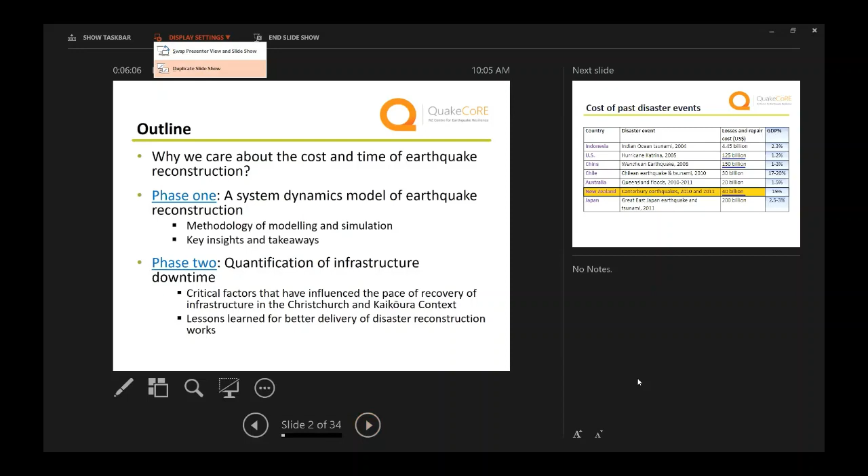Right, so I think this presentation - I've only got 40 minutes. Alice, sorry to interrupt, are you able to set your display settings to duplicate? We see the note screen. Display settings at the top - setting, display settings at the very top. Okay, yep. Duplicate. Can you see only one slide? Very - now good, okay, cool.

So I think I will first talk about why this topic - why we should really care about the cost and time of earthquake reconstruction.

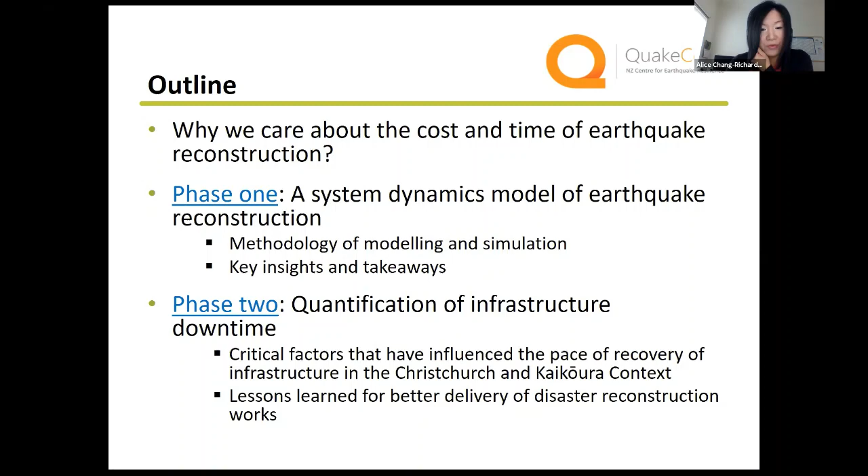I will split this project into 2 sections. One, I'll briefly introduce our system dynamics model, which I've actually presented before to the flagship 5 community, but I possibly want to spend a little bit more time on our phase 2, the quantification part of infrastructure downtime.

So I think first I want to really bring everyone's memories back about the previous disaster events. Those are all the events I've actually been involved with in terms of reconnaissance trips or longitudinal case studies in different countries. So if you look at the losses or the repair cost of all these different events...

What really struck me was really 3 events I actually highlighted, like Hurricane Katrina in the States and also the Wenchuan earthquake. Of course you possibly also saw the Japanese earthquake and tsunami in 2011, which also cost more than $200 billion. But in comparison, in New Zealand the overall estimated cost was still remained at $40 billion.

I think if we only look at the general losses and estimated cost to repair all the damaged assets and infrastructure, it didn't actually give us much information.

But if we look at the ratio of this loss in comparison with the national GDP at the time, I think it would give us another insight. The $40 billion losses in New Zealand was actually very significant to the country, as it accounts for nearly 20% of the national GDP, whereas in the US, China, or even Japan, the amount of damage accounted for only between 1% to 3% of national GDP.

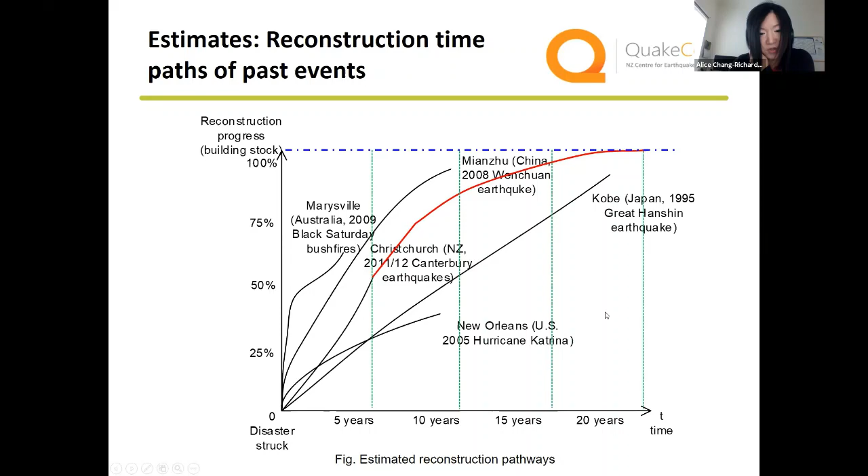So the question is, what actually makes a difference in terms of reconstruction time?

For instance, if you go to any community affected by a disaster event, including Christchurch, and ask people when they want their house to be built or repaired, the immediate response for most people is tomorrow. They want everything repaired and rebuilt as soon as possible so they can get back to their so-called normal life.

So the question is how we can improve our understanding of what's actually driving the reconstruction time frame, and what really makes a fundamental difference in the time path of different events. This is what motivated us to gain this understanding.

For this research project, there are 2 phases. We were successfully funded by QuakeCoRE in phase 1 from 2017. Over nearly 2 years, we tried to understand what fundamentally differentiates the earthquake rebuilding time path in Christchurch, looking at 3 sectors: infrastructure, residential housing, and commercial.

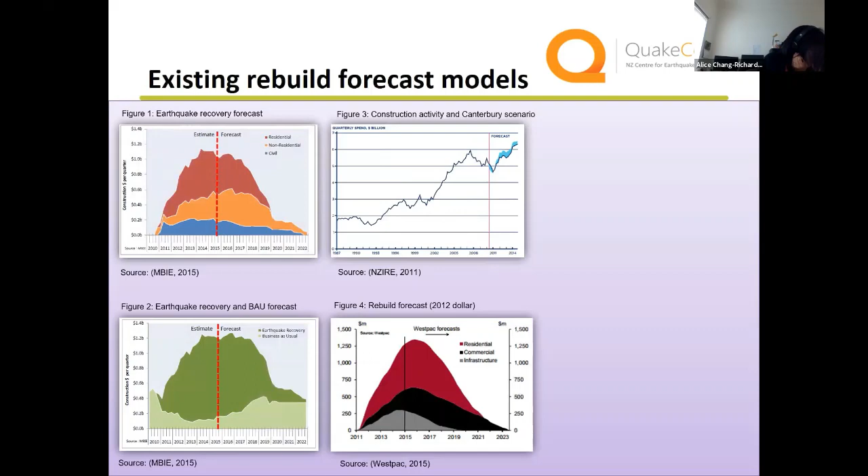So I'll briefly explain what we did in phase one. In New Zealand, following the Canterbury earthquakes, we actually have some existing rebuild forecast models, done by different organizations like SCIRT and MBIE, who had earthquake recovery forecast models.

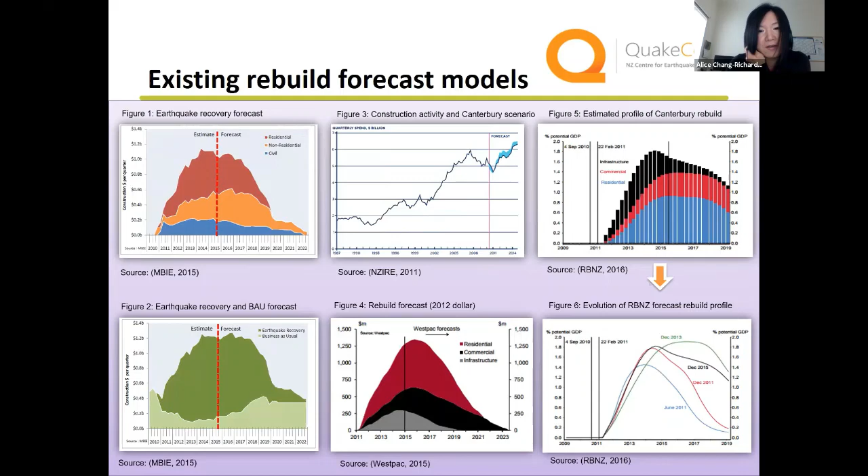Those models were shared across different recovery agencies and organizations. We also have the New Zealand Institute of Economic Research with their own forecast, as well as the Reserve Bank and Westpac. At different stages, they all tried to forecast what the profile of reconstruction would look like.

But the challenge we found is that, even with very good construction forecast models, the construction sector still finds it difficult to forward plan resources and associated rebuild activities. The reason is that relying solely on the intentions of spending to predict reconstruction time path is not really sufficient.

What we really need to understand is more about what is actually happening during the reconstruction process, and then how we can make sure that once we've identified those critical factors, we can manipulate them to achieve a more speedy recovery. So we used a different approach: a system dynamics model. This model considers the damaged building stock as a system, and as the model changes over the entire reconstruction time, we try to understand the dynamics underlying why certain things happen.

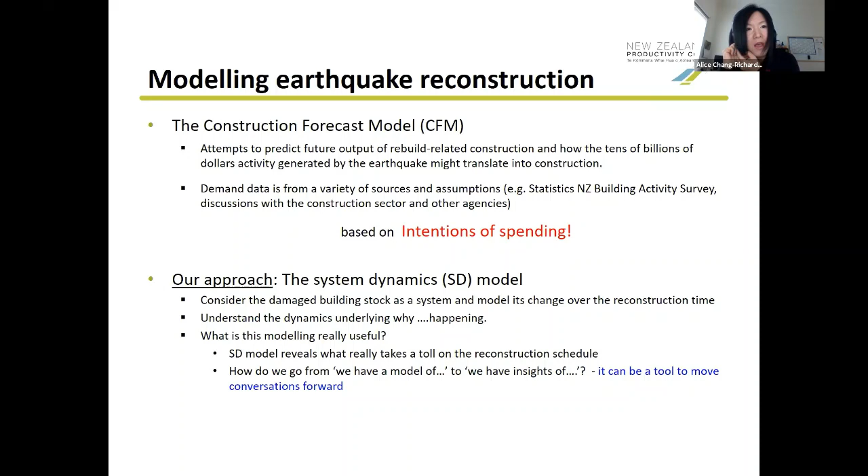One thing I want to highlight about our approach: it's intended to reveal insights about what really takes a toll on the reconstruction schedule, and also to explain, from the model, what kind of insights we can offer to the industry and government agencies. We found that the system dynamics model can be a very good tool to move these conversations forward.

Also, quickly explaining our methodology: we divided the entire reconstruction process of the built environment into 4 stages, starting from inspection, like damage assessment, and then moving to decision making. Decision making here involves land zoning, planning, and setting up governance institution arrangements like SCIRT for recovery, so all the critical decisions involved for overall recovery.

After all the decisions are made, it comes to the financing and planning stage for the damaged assets. For instance, for the residential sector, this involves the insurance payout process, and also what kind of design and foundations should be put in place for a particular house. There's a lot of planning involved in this stage. Once everything is in place, it can move to the repairing and rebuilding stage.

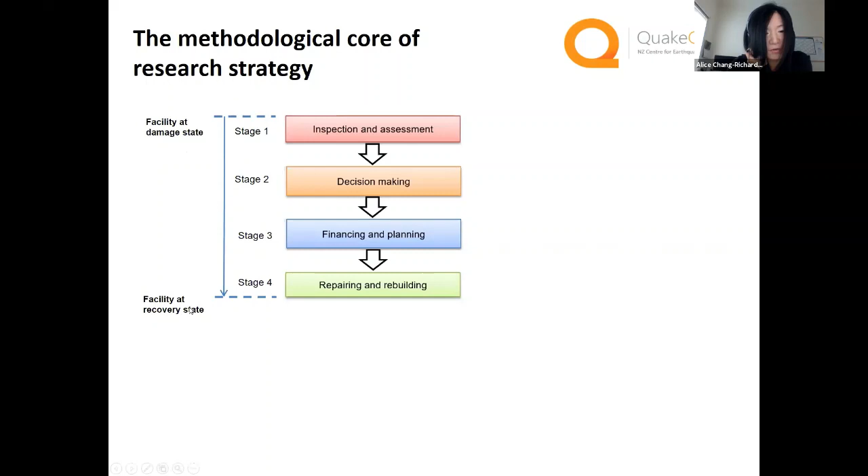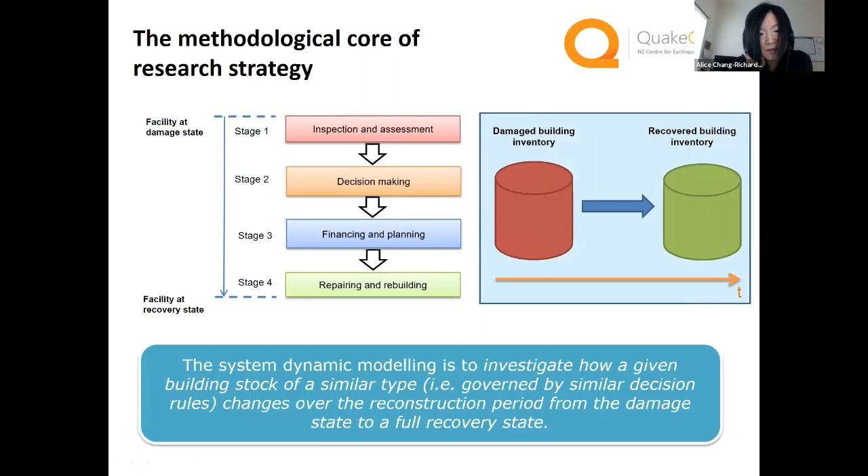What we try to do is, for one damaged facility, whether it's a residential house, a piece of infrastructure, or a commercial building, we model how this facility changes from the damaged state over time to its full recovery state. I'll use this diagram to show what we're doing: using system dynamics modeling to investigate how a given building stock can change over time from the damaged state to the full recovery state.

I'll quickly brush off these parts because it's pretty much system dynamics modeling terminology and jargon. I'll try to explain it as simply as I can. This is more like a causal diagram to illustrate what we're saying.

For instance, a damaged structure, after inspecting and assessing, goes through the decision-making process. Then this is another stock, we can name it structures under decision rules. After financing and planning, we can call it structures ready for repairs and rebuilds. After a certain time, this stock moves to another state called structures working in progress, or under work. So this part is really the physical construction process.

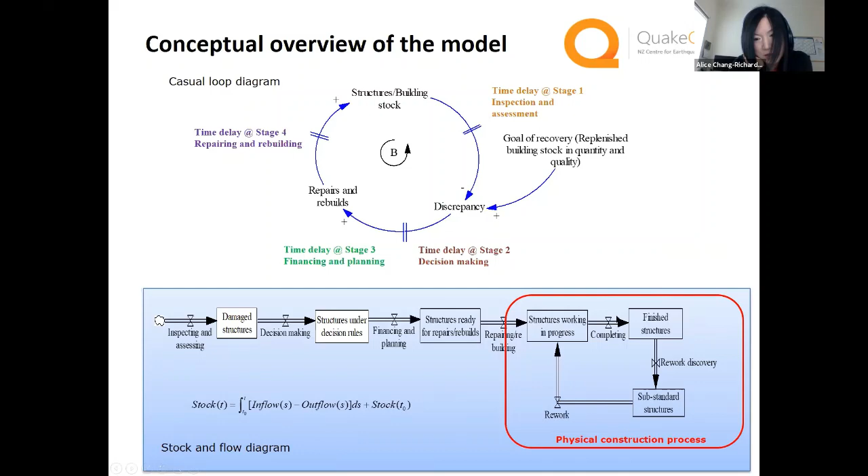But for a damaged building or piece of infrastructure to move into this physical construction process, it has to go through the entire preceding procedures. Here is a more mathematical representation of how one facility can change from the damaged state to, in the end, the full recovery state.

We also did interviews with a large number of stakeholders and construction industry practitioners and government agencies. We have identified conceptually the critical mechanisms affecting rebuild recovery time in general across the three sectors. Those mechanisms fall into four categories.

Of course, planning and regulation play a major role. The second one is not a surprise, it's always resource constraint, the capability of the engineering construction sector. Then there's the financing mechanism, including the insurance settlement process, and also the decision-making time needed and actions of different facility owners, all playing a part in influencing the rebuild time.

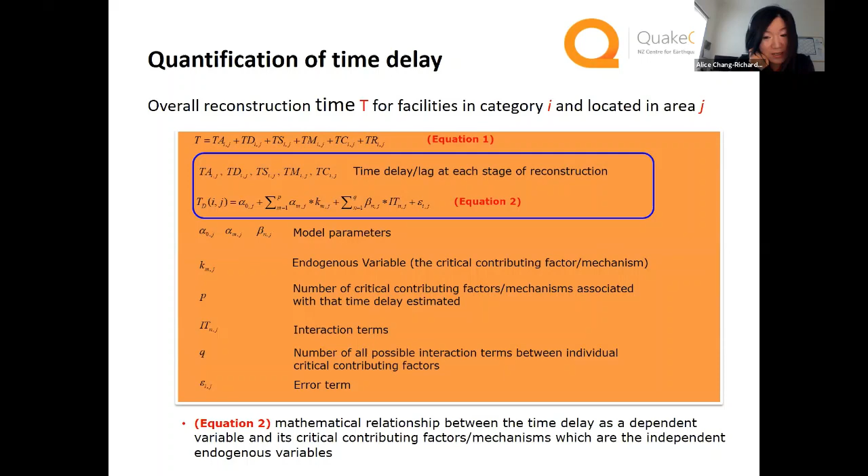So what we try to do is make sure we populate the data we've got into a system dynamics model. Then we use mathematical relationships to represent the different time delays, and how these time delays aggregate together or interdepend on each other to make a big difference in the recovery time in the end.

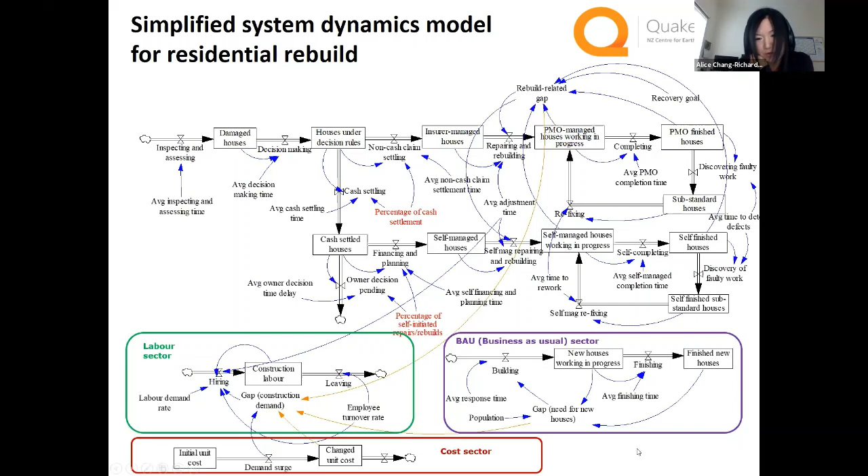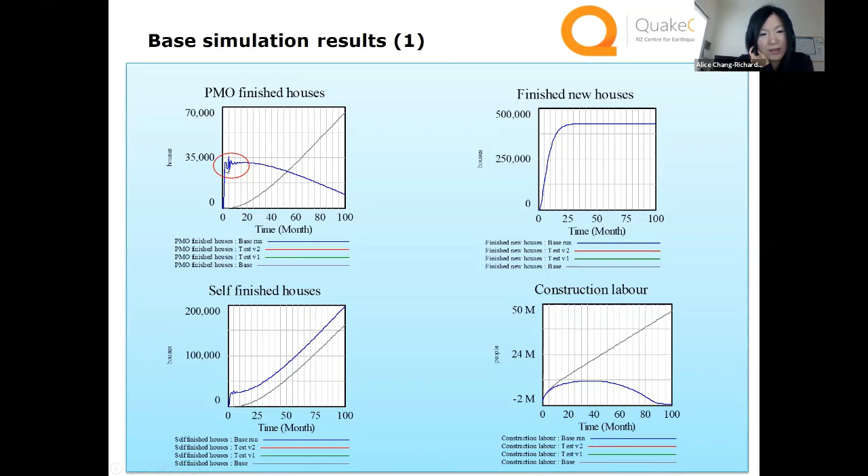So what we did was try to play around with the model to see if we change certain ways the construction sector perceives construction demand, whether we can change the model behavior or the results of the system. What we did was change certain links about where the reconstruction is taking place. At the same time, the construction sector can also have clear visibility of business as usual activity, not only in subdivision areas in Christchurch, but also in Auckland, nationwide, and in Wellington, the infrastructure development happening in other major cities in New Zealand.

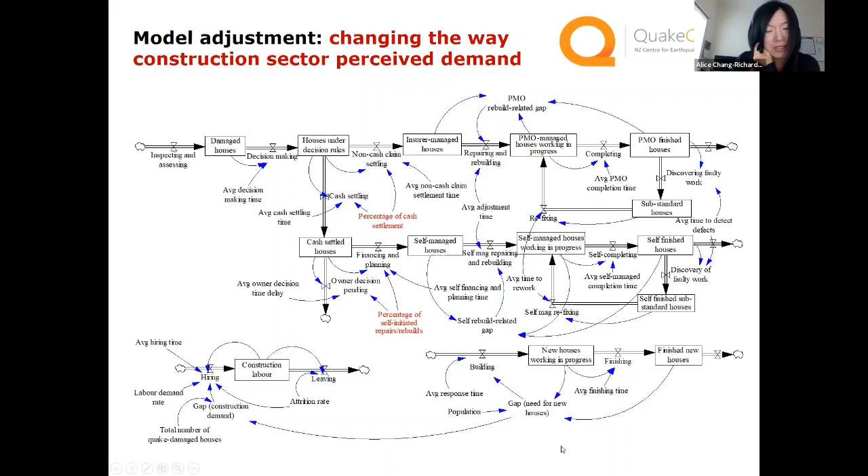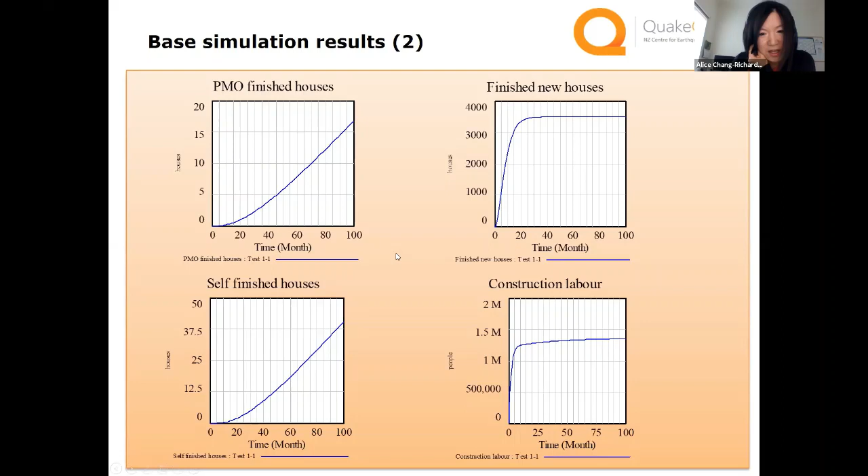At the same time, they have a very good understanding about their capability and resources. So then what would happen? So this is what we've got. We get a nice result, which means there's no oscillation, there's no waste of time, and also no waste of resources.

The first one is we should not overlook the percentage of the total demand, especially from the business as usual sector. Surprisingly, we thought most resources would be drawn to the rebuild sector, but actually what we have found is the value of the business as usual sector also imposed a constraint on how fast we can build in the earthquake reconstruction sector.

And others is pretty much we know very well in terms of how fast the insurance claims can be settled, and the entire sequential requirement, which means the logistics needed to coordinate with the different sectors, having an understanding about the priority of the reconstruction, and then planning for the different services in the horizontal sector to be rebuilt first, followed by the residential sector repairs and rebuilds. So there's planning sequential requirement needed over there.

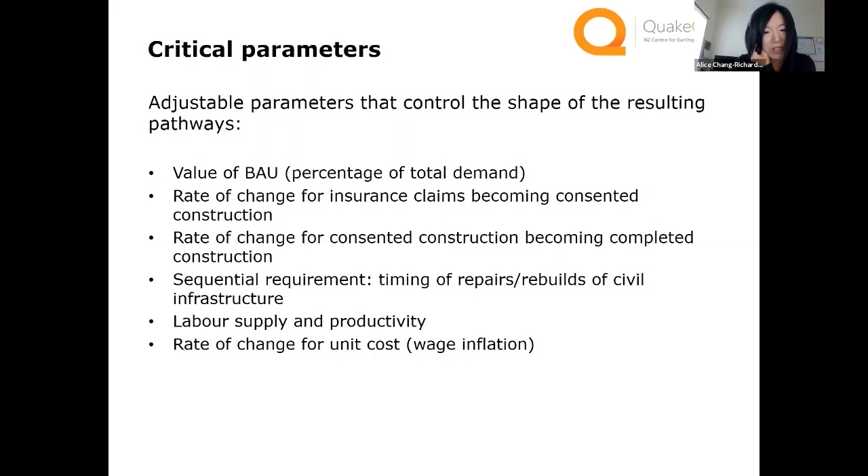And of course, labor supply and productivity, plus the wage inflation. I want to highlight that labor supply is always a problem for the rebuild sectors, not only in New Zealand, but we also have observed in other countries, which always leads to the unpleasant result of wage inflation or cost escalation in the rebuild sector.

Then we try to look at what are the critical links that, if we change certain links, like how the construction sector can perceive the construction demand, the results of the time path can be completely different. So we found regulatory changes are so important because the changed building code and building standard after the quake posed changes to the technical capacity landscape in New Zealand.

Critical links are information links. Things pretty much to do with how the construction sector can really adjust itself in terms of how it can correctly perceive the information, the construction pipeline information from the government, and also the perceived timing.

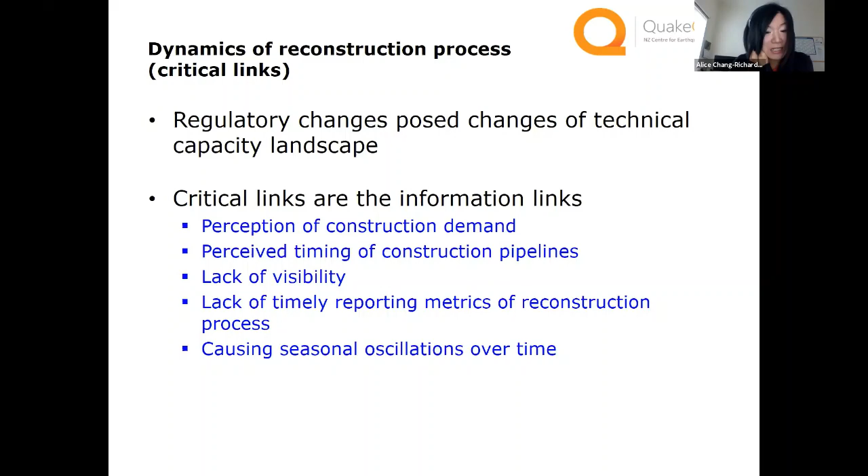In general, there's a sense that there's still a lack of visibility of the reconstruction timelines, which means there's a time lag between the agents reporting the reconstruction pipelines and it becoming real construction, which means the eventuation process always has a delay. And that caused the oscillation over time in the system.

I'll quickly go through this. I think what we have observed from stage 1 is the reconstruction driven by the regulation insurance process. The oscillation type of system behavior shows the unstable response actually from the construction sector. As I said, there's always a delay in the demand landing for reconstruction, which causes incorrect demand perception in the construction sector.

Also, a very important piece of information we want to give to the construction sector, which has been involved in reconstruction and plays a major role in earthquake reconstruction, is that we need a better information reporting system, which means we don't use lagging metrics. That can really help the entire reconstruction process and help speed up any recovery process.

So we have recently published a nice, neat piece of article in the BRANZ Build magazine. If you're interested, feel free to go have a read.

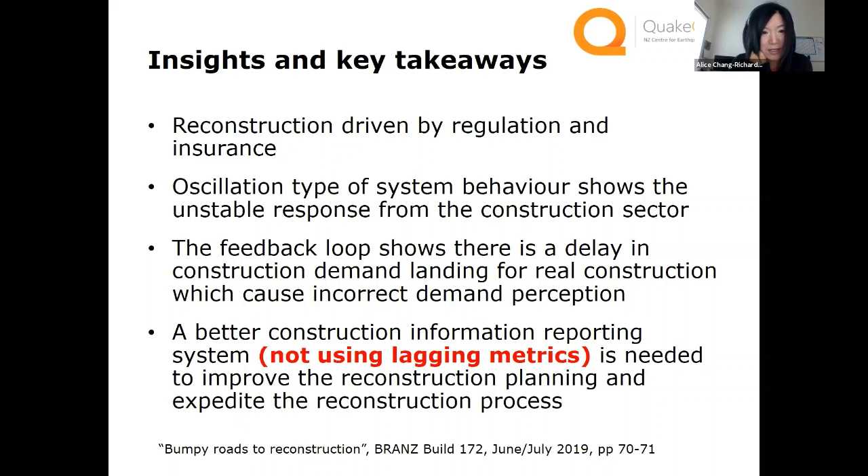So now it takes us to phase 2. Phase 2 is more about, now we pretty much understand how the system, a building stock, can change from the damaged state to the recovery state, and what are the underlying mechanisms at play. But we want to also understand, does that also apply to the infrastructure sector? And to what extent each critical factor can play a role in influencing the infrastructure recovery time.

So we have undertaken quite extensive field trips to both Christchurch and Kaikōura, not only to understand those critical factors and what that means for the infrastructure sector, but also to understand the different involvement of various groups and what they perceive about their involvement. So I took my lovely master's students and E4 students to Christchurch and Kaikōura. We stayed there for nearly a month.

So we did very extensive interviews with all the different agencies in both Christchurch and Kaikōura. This gives a general overview about who we have talked to. Really big thanks to SCIRT, Christchurch City Council, Kaikōura District Council, and NCTIR for facilitating us with the data collection.

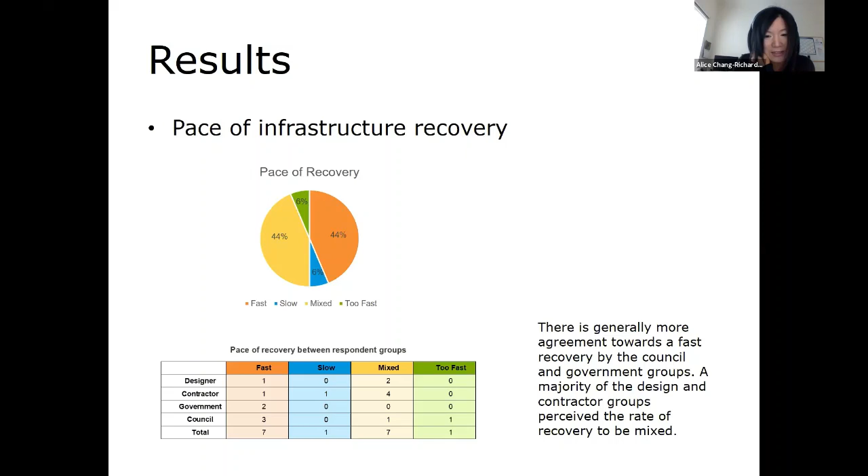We also asked about what challenges were faced in the reconstruction of infrastructure facilities, and divided these challenges into different stages. In the inspection and assessment stage, there was a general sense of lack of information with the council-owned asset management system, largely due to lack of original data about the different utility services underground. So there was a lack of data, and they had to do an extensive amount of work resurveying and gathering the data together and setting up the database.

In the financing stage, they reported, especially for the council, that procurement can be problematic, as they still use a traditional procurement model, so freeing the financing for project allocation can be a little bit challenging.

In the decision-making stage, this is where they highlighted the most challenges, particularly around scope establishment. Especially from the contractors' perspective, they perceived a lack of collaboration between different stakeholders, because they were at the end of the supply chain, the people at the end of the construction process. So they bear a lot of risk if there was a lack of collaboration among stakeholders at the preceding procedures, which shifted a lot of risk to the contractors.

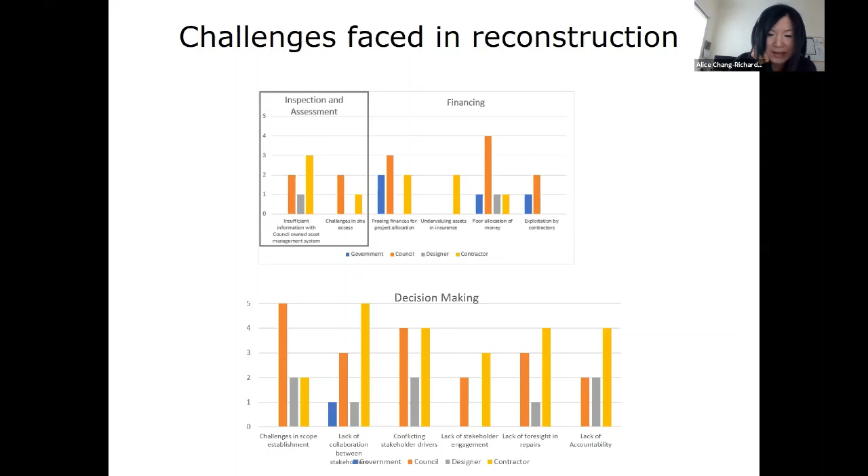There were also reporting results from the contractor's perspective about lack of stakeholder engagement, mostly between contractors and subcontractors. They mentioned the alliance model used for SCIRT and NCTIR was very good at bringing everyone together, but subcontractors felt left behind. They thought if they could also be part of the conversation, as well as the suppliers, because supply chain efficiency can also take a toll on the reconstruction scheduling - suppliers and subcontractors should also be part of the conversation.

When it comes to adjustment, it's more about the planning needed prior to construction. They had very different opinions across the board, so I just want to highlight a few.

The yellow bars show the opinions reported from a contractor's perspective. Since they are the people who will, in the end, do all the physical reconstruction work, they really care if anything happening prior to construction can affect them. So it's not surprising their responses often sound like complaints about the challenges they faced, including a very quick turnover in companies, along with fatigue and burnout.

They also mentioned lack of accommodation in Christchurch, and many other reasons that made it very difficult to maintain staff and keep morale high. Not surprisingly, earthquake fatigue really took a toll on many businesses. A lot of businesses ended up fed up with involvement in the rebuild sector and withdrew, going back to business as usual, because for them the perceived risk was lower.

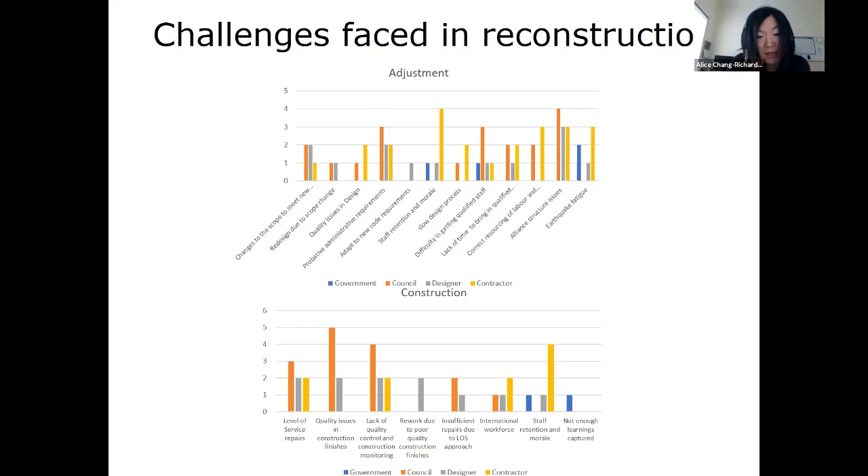The interviews and questionnaire surveys also highlighted the good practice initiatives that actually drove up the speed of recovery. I've listed all these good practice initiatives from top 1 to top 10.

There's a general sense that the exposure to delay has to do with the financing and claim settlement stage, as well as the construction stage. As they proceed through the financing and claims settlement stage and the construction stage, there are more risks and more time delay factors.

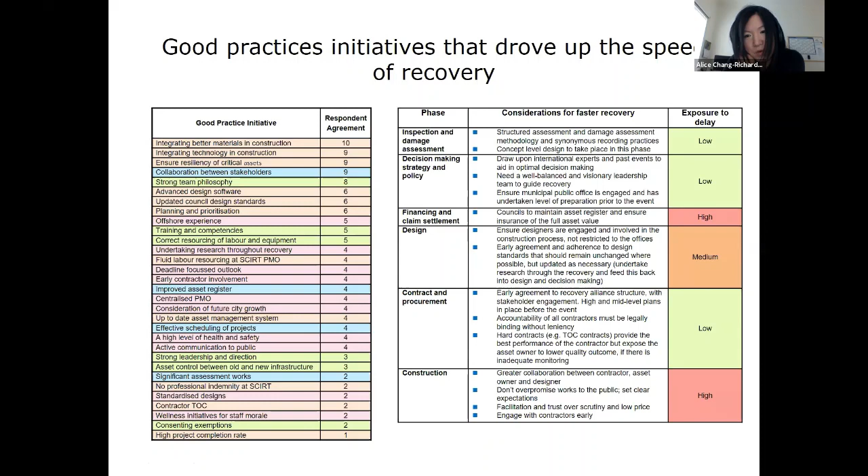We also categorized the learnings from different perspectives: for designers, contractors, government officials, and council staff.

I also won't go too much into the details, but I want to highlight that we ran two focus groups, with both Christchurch City Council and Kaikōura District Council. The common notion from those two focus groups was that, before setting off any reconstruction work, it's critical to understand the different drivers of stakeholders.

It's critical to understand the different drivers of stakeholders and also managing different expectations.

They also mentioned the procurement model, and how going forward for future reconstruction work, the treasury traditional procurement model could be improved, so that it not only has design and build plus all the different stakeholders and clients involved in the alliance team, but it would also be ideal to include the subcontractors and even suppliers in an early contractor involvement kind of regime in the procurement.

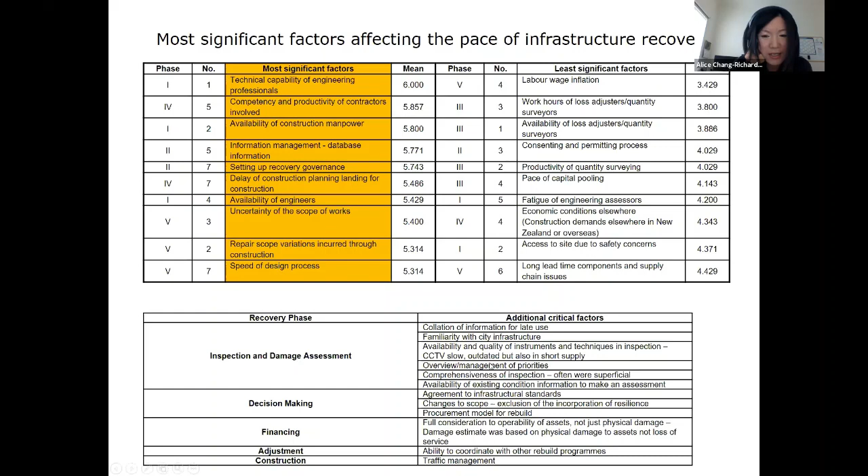So I want to highlight at least the top 5. You can see that the majority thinks what really affected the pace of infrastructure recovery lies with the capability of the engineering and construction sector. They also suggested several other additional critical factors.

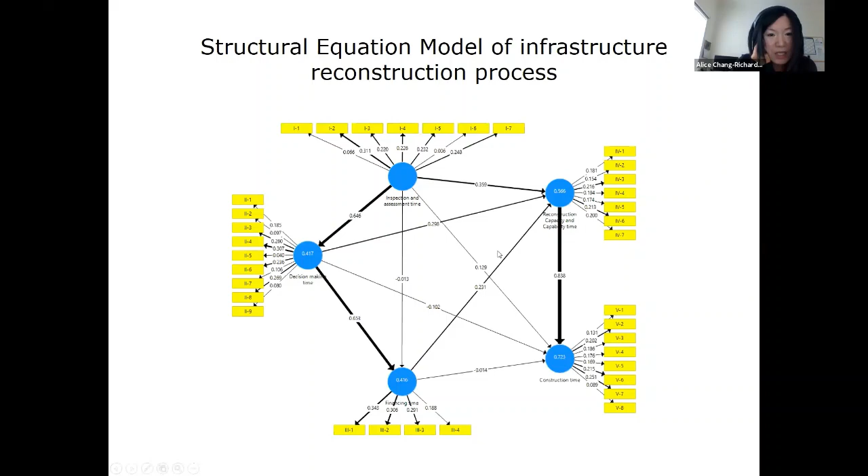So I'll possibly stop here. And if you have any questions, please feel free to let me know.

Just a final note - I'm currently on sabbatical leave, so I'm heading off to Japan very soon to gain another understanding about how the Tohoku earthquake and tsunami reconstruction has progressed over time, and how much the cost variations are. So the future plan is to make a comparison between Japan and New Zealand, so we can get more insights and learn certain things from Japan.

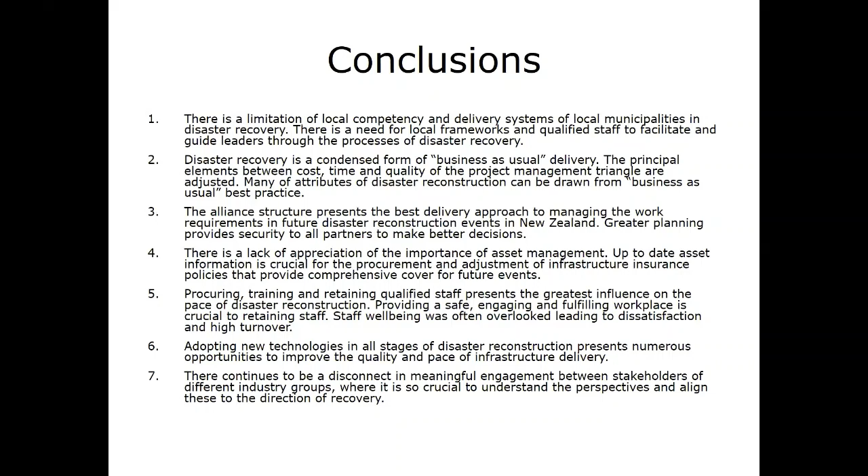Yep, yep, I was just asking about the net cost of the Canterbury earthquakes at 40 billion US on your table. Could you clarify that? It seems more than I'm familiar with - perhaps I haven't heard the more recent figures.

Oh yeah, I think the initial estimate was 10 billion. That was pretty much immediately after the February 2011 earthquake. And then it changed to 20 billion 6 months later. So the figure I showed you was actually, I can give you the source - it's actually the officially recorded number that's also being considered as the latest from the government report. They changed it to $40 billion. So I haven't seen any update about how much in total the recovery has cost, but I think that was the only official figure, the latest one I can get.